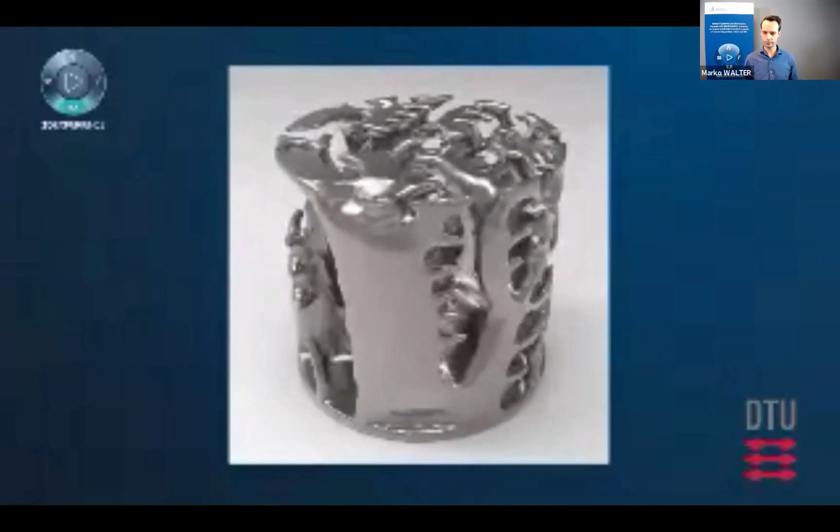As a researcher who has been one of the inventors of topology optimization, I've been in that field for 25 years. And in the beginning, people were sort of laughing a little bit and saying, hey, you came up with this fantastic structure there, but nobody knows how to manufacture it. So what are you going to do there? And I said, well, let's see, with time, this will come. And so it has sort of steadily been increasing this field all the time here for 25 years.

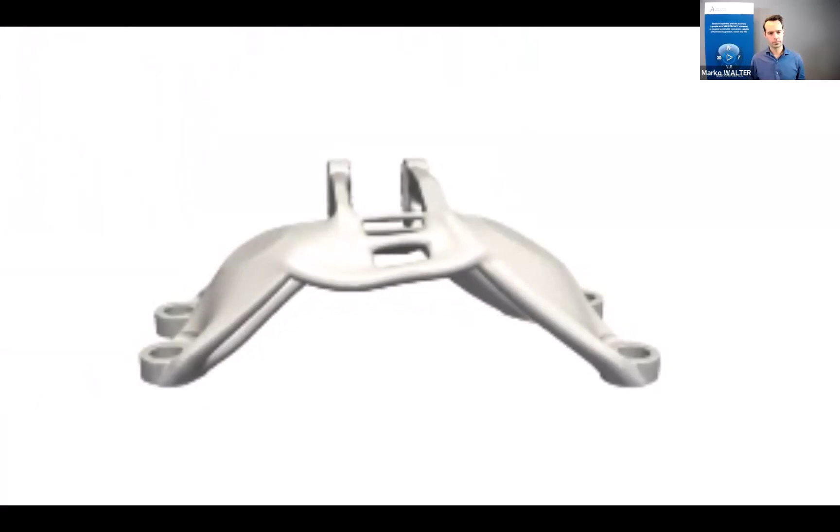But now recently, in the last few years, it has really increased the speed of development with additive manufacturing and combining it with topology optimization. So for me, it's really fantastic to see how many industries are using it. So essentially, additive manufacturing offers ultimate freedom for manufacturing, but they don't know how to come up with these optimal parts. And on the other hand, topology optimization uses this ultimate freedom to come up with parts that are optimized for specific load cases and extreme situations.

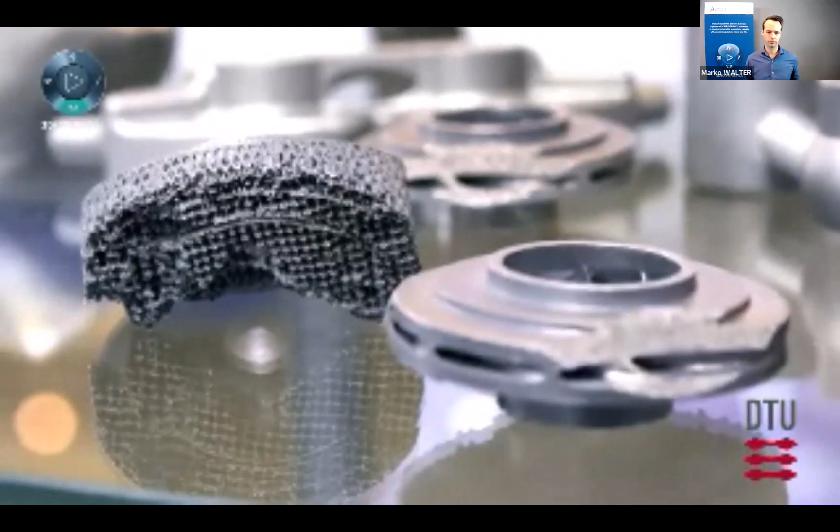And so topology optimization provides the designs to additive manufacturing, and additive manufacturing makes it possible to realize the designs coming from topology optimization. So that is an ideal marriage. So it's an interesting research area that still has so many possibilities and so many open ends. So lots of interesting research and development to be done there. And certainly the last sentence has not been said in that aspect yet.

So as you can see, this is quite an exciting topic that has been around in structural mechanics for a while, and it's really proven technology, even branching out into other physics like fluid dynamics and photonics. However, when it comes to electromagnetics, and specifically on the high frequency side of things, and as we're talking about antenna design today, I would say it's something that has not yet taken off. And so today I would like to introduce to you the topology optimizer we have available with the new release of CST Studio Suite 2024.

As it is a new topic for antenna engineers, including myself, the essence of what I will present here is still very much research oriented, and I will be showing multiple test vehicles and examples that we have successfully done so far. But my hope is really that after this talk today, at least you will be inspired to try it out for yourself and really try and push the boundaries of conceptual design for antennas.

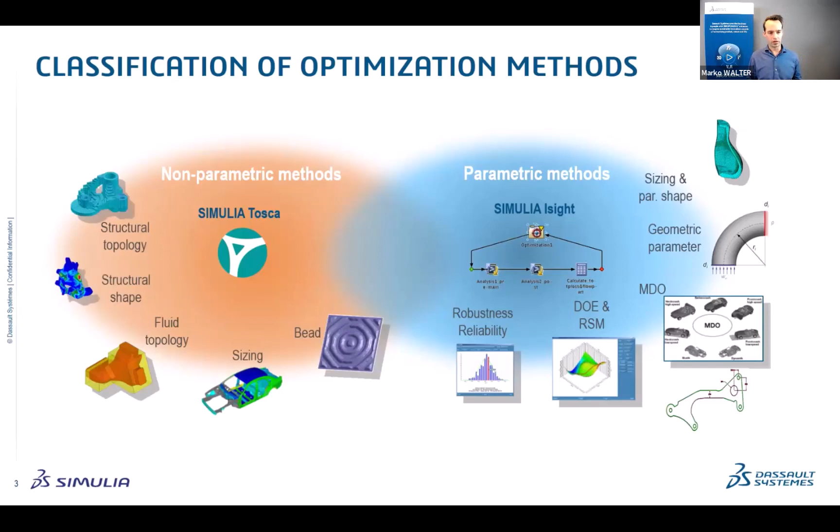On the left-hand side, then you have the non-parametric methods, which is provided by SIMULIA's tool called Tosca, also available on the 3DEXPERIENCE platform through different roles available there. But I will be talking about the standalone version today, and it can cover different things like structural topology, structural shape, fluid topology, sizing, and even beading. So topics that are well suited for structural mechanics. And then of course there can be also a combination of both these groups.

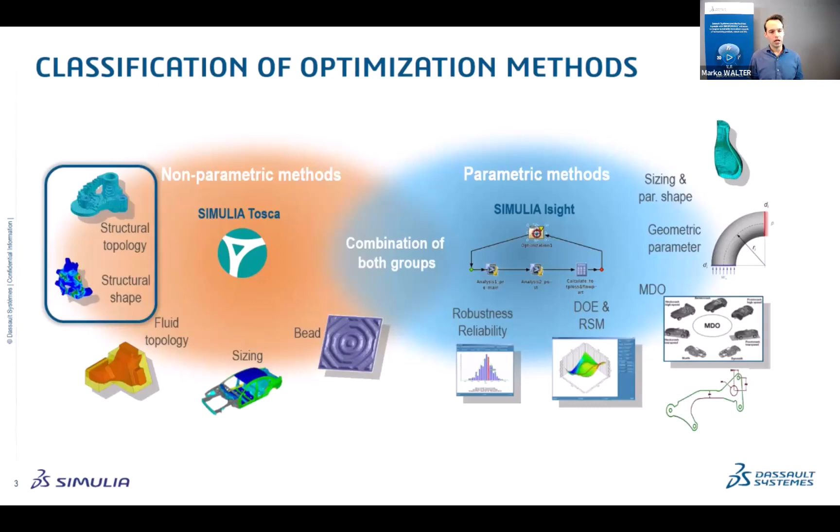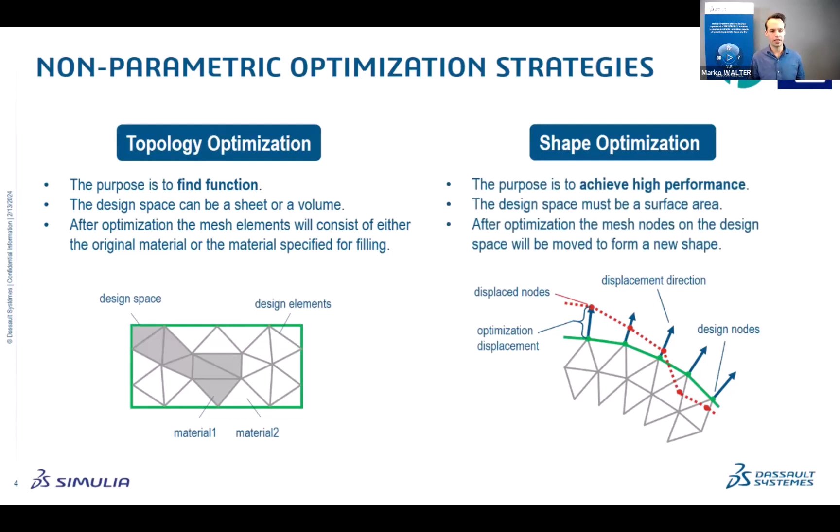On the right-hand side, then we have shape optimization, which has the purpose of really starting from a design, starting from something that already has some performance, and you want to achieve really high performance. You want to squeeze out the last bit that you can. And the design space there would be then some surface area. This can also be a volume, just the surface of a volume. And the idea is that after optimization, mesh nodes are moved on this space to really form this new shape.

However, the focus of this talk today, specifically for our antenna applications, is topology optimization. I will circle back to shape optimization, and just a note on that as well. Tomorrow, during the filter and components day, we will have a talk on shape optimization as well, and I'll touch a bit on antennas there as well.

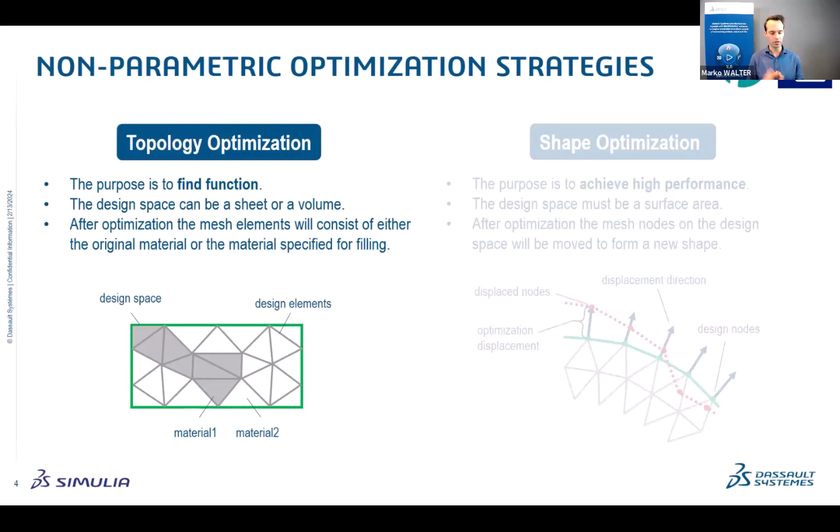Now, for non-parametric optimization, we support the frequency domain solver with model order reduction, as well as the eigenmode solver with general lossy, meaning that it can also take loading effects into account. But the eigenmode solver is a bit more tricky when it comes to topology optimization, well suited for shaping. But we're not going to focus on this because we're going to focus on driven problems today, and specifically scattering problems for antennas.

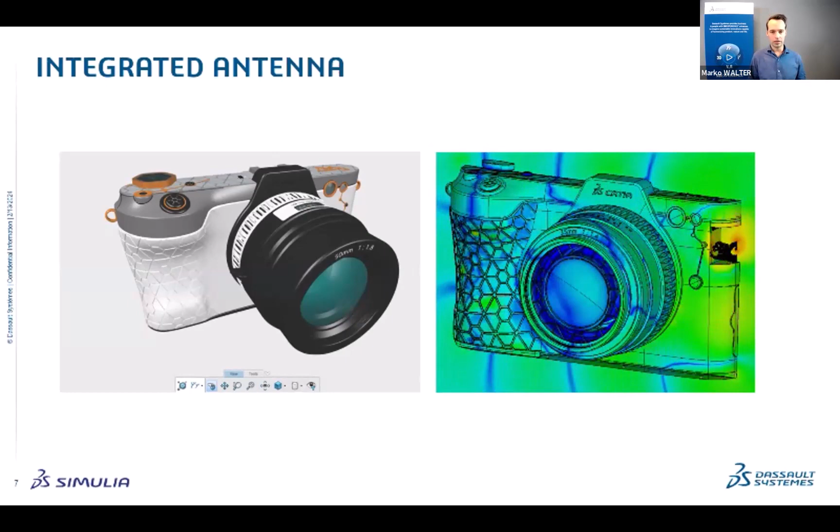So let's talk about some antenna concepts. Let's start with just some conceptual things. So let's say you have a device here. It's specifically a camera with a transceiver on it, and it's supposed to upload really large files very quickly to the cloud. Of course, you need connectivity then, and this product is already close to production, and they need a connectivity module. There's just a small space allocated within this product for the antenna, for the radiator itself. And so the question is what to actually put in there.

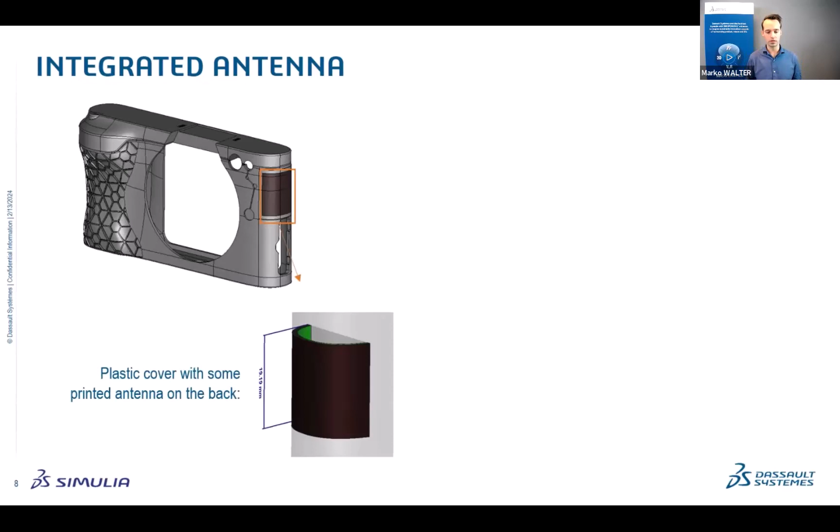So there will be this ABS plastic cover. So why not just print on the back of this cover? You can see the plastic cover there. Can we explore this design space and see if some topology is appropriate? So you see this green space on the back of this cover, which is not connecting with the device itself electrically or conductively. And you can see the coax connector placed on the edge of the design space. This is just the seeding point for this problem. It can be placed at any point, and you will get a different topology out.

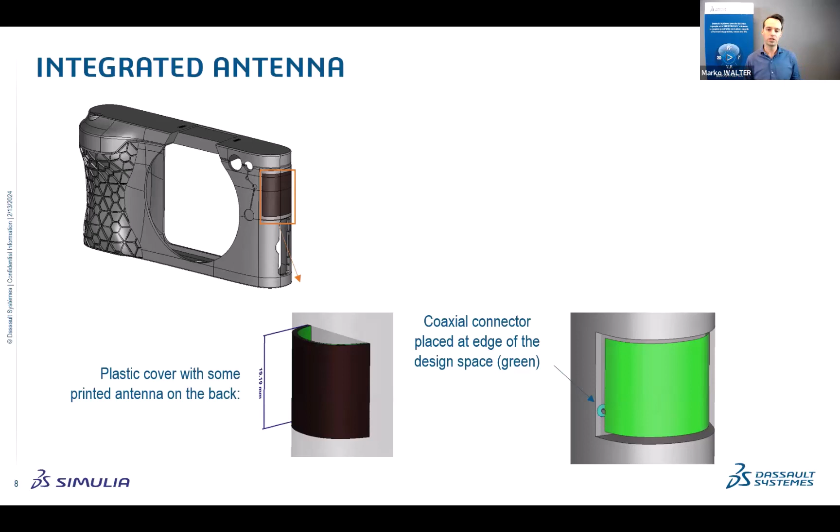So the motivation is, can we get radiation efficiently over the spectrum from 3.4 to 3.8 gigahertz? So here you can see the topology starting to optimize, and the dark red is indicating a good conductor, and you can see the blue section is just falling away, which is vacuum in this case.

And we are maximizing radiated power, which you can see as the objective function in the top graph, and after a few iterations it's already getting very high. And of course, the input power in CST Studio Suite is typically 0.5 watt, which means it's getting close to that, reaching a level of probably 90%. We'll look at the numbers in a second.

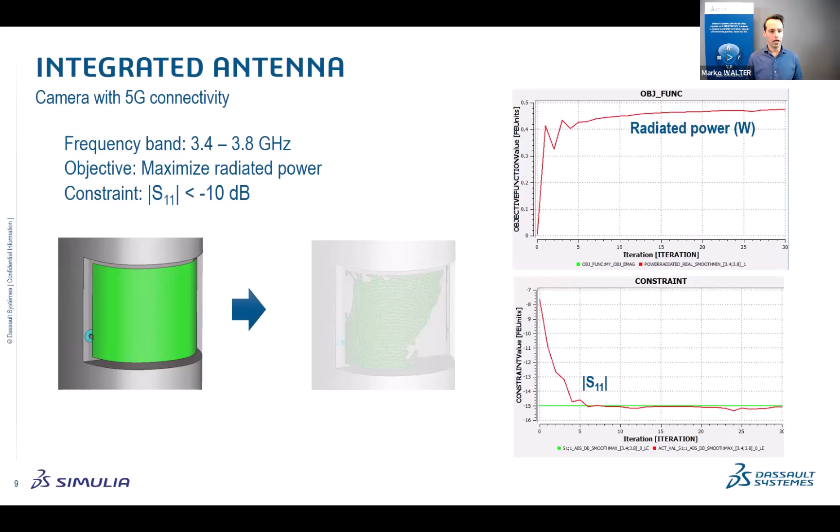You can also see at the same time the reflection coefficient dropping below minus 15 dB in this particular case. And with that, you have this new interesting looking topology, and you can verify the results even with another solver to determine the radiated power efficiency and specifically the input match, where you get a broader band, but of course your efficiency will degrade a bit.

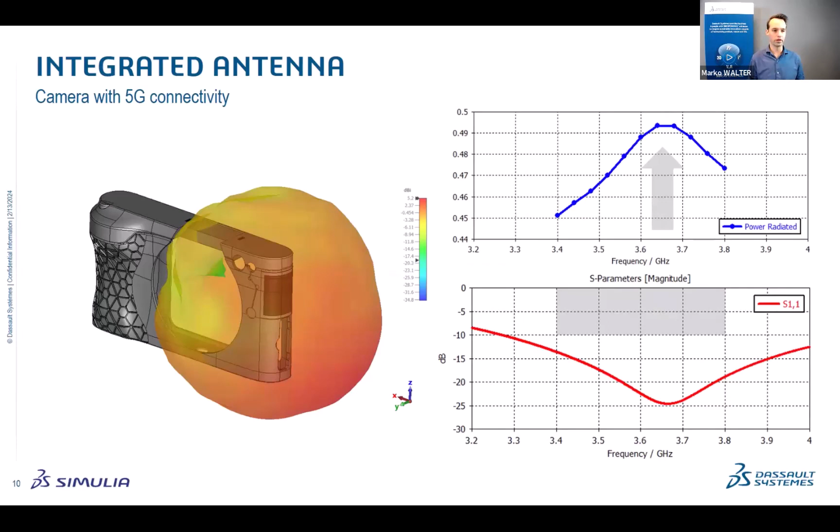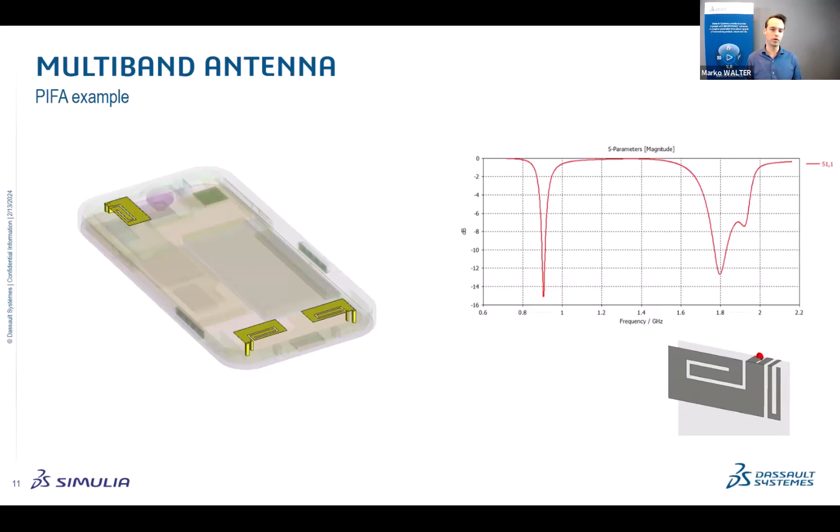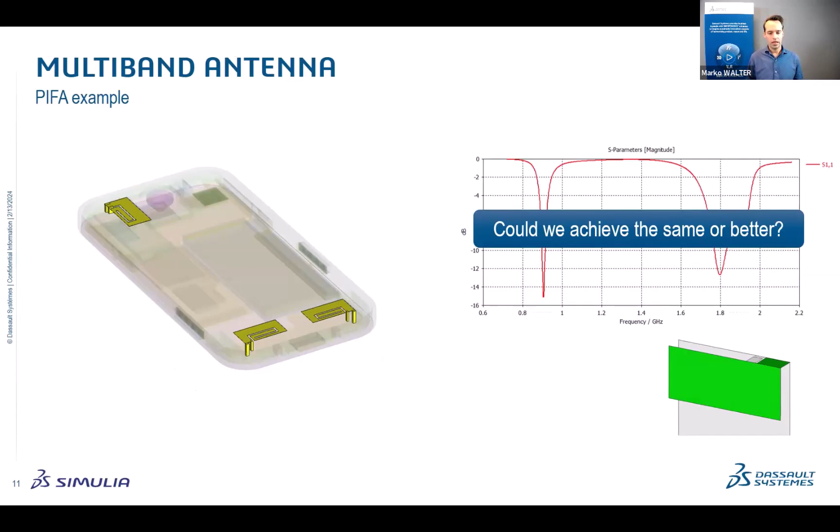Now, another simple example, talking about integrated antennas: PIFA antennas have been used for a long time, and they have good properties for a multi-band response. So the question is, can we take just the sheet in the same footprint and achieve something similar or perhaps even better? So we maximize the radiated power at 900 megahertz and at 1800 megahertz, simultaneously constraining the reflection coefficient in both these bands.

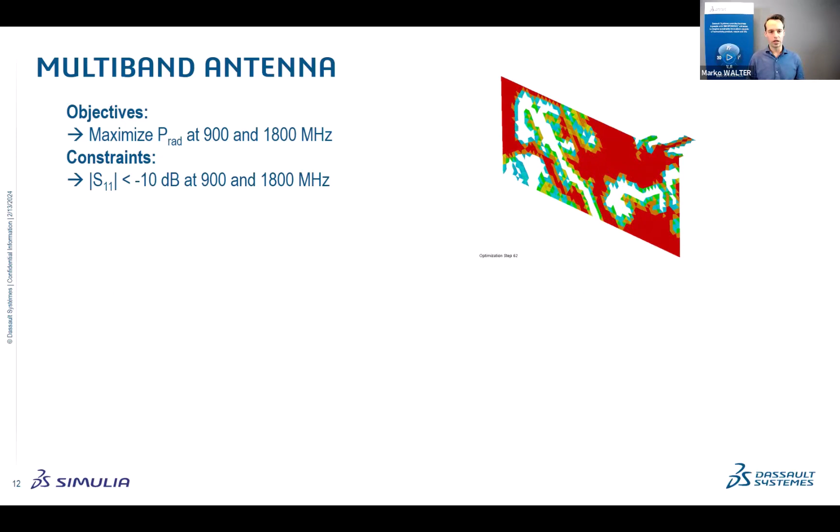And you can see the topology coming together. You see that inductive part next to the feeding point coming together, still shorting out to the backplate there, which is also necessary for the lower band.

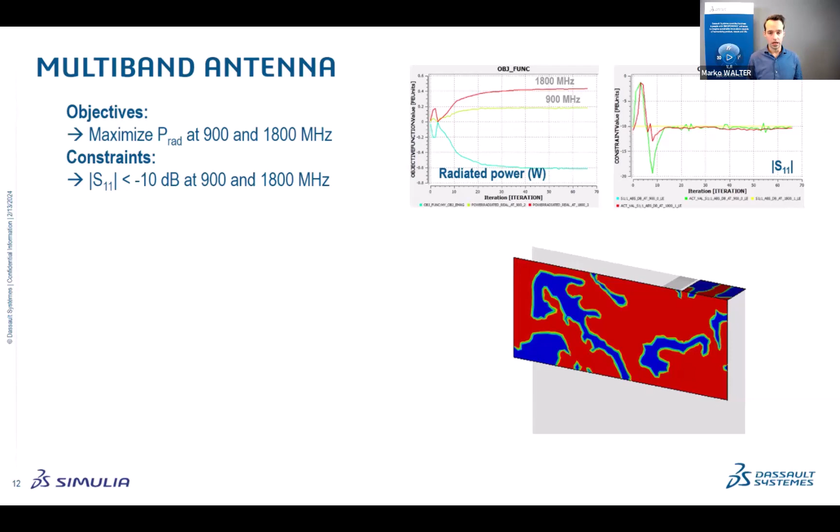And you can see then the radiated power again, 1800 megahertz and 900 megahertz going up. And the thing is, you need to verify these results again because, and I'll explain this in a second, basically you want to specify some threshold for the densities. These intermediate densities are going from vacuum to the conductor, and to cut something out, to get some ISO cut as we refer to it, to extract the specific topology. And this threshold can also vary, and I'll talk about that in a moment.

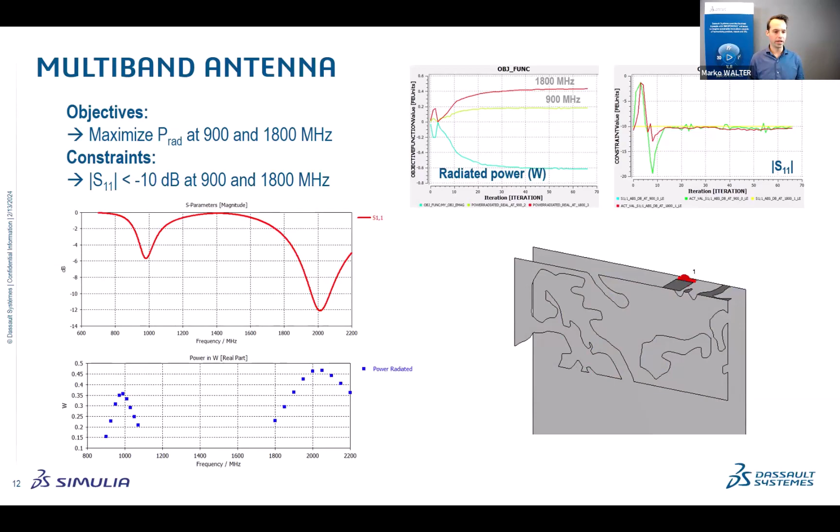You can see then on the left-hand side also the input match and the radiated power at the bottom. So not too bad, but it is shifted. If you've noticed, the objectives were at 900 and 1800, so it's slightly shifted. And the reason for that is that we are actually working with intermediate densities, which can be observed here from the conductivity. If you look at the color ramp there, going from close to 0, which is essentially my vacuum or my air, to a very high value for a good conductor. In this case, I think it was copper or something. The result is that everything in between is essentially posing dissipated losses to the signals, right?

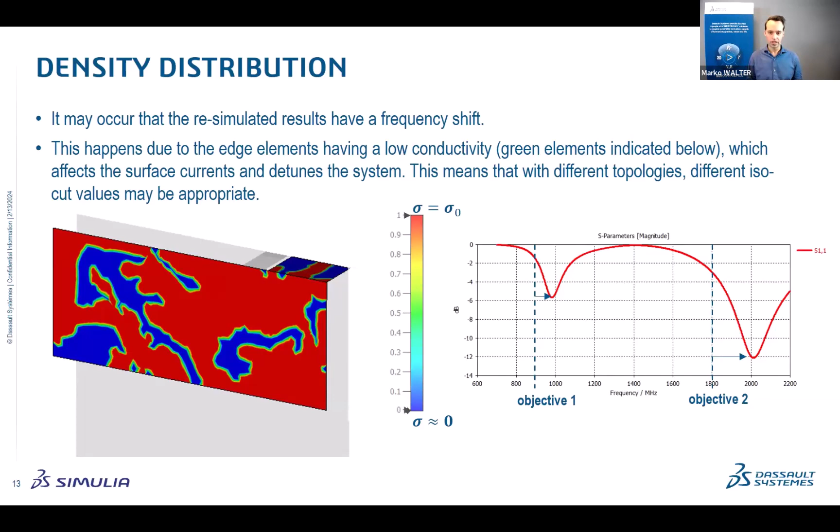Now, let me try to explain a bit why we need these. So with the topology optimization, the original integer problem is basically relaxed here, allowing continuous and intermediate design variables. These so-called intermediate densities then allow for a mathematical programming approach using adjoint sensitivities. So every element essentially is sensitive to some degree to my objective function or my constraint. And this adjoint sensitivity approach has a very good track record for efficiently optimizing large problems. So we're talking about being able to address thousands to even millions of design variables in just a few optimization iterations. Okay, so that's some context for why we use these density distributions.

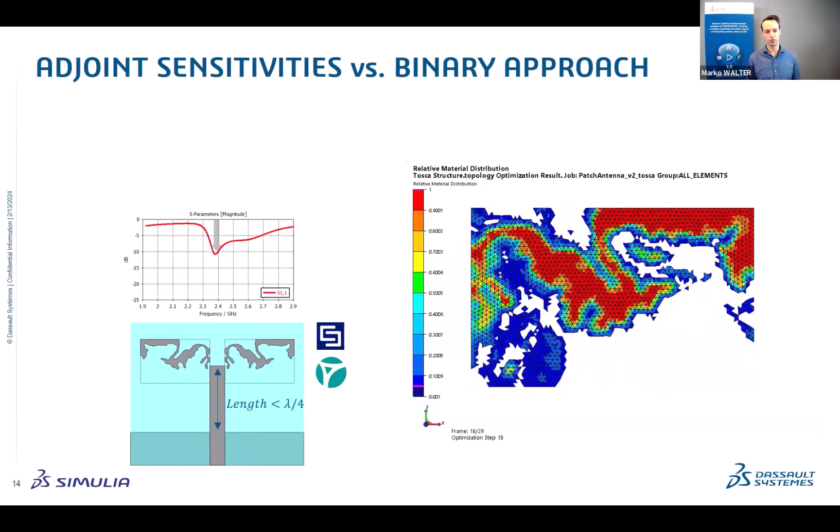Now, here is a simple illustration of how efficient this is. We have a short printed monopole where the parasitic elements are used to obtain a good input match at 2.4 gigahertz, because of course, when it gets so short, the radiation resistance is getting much lower, and so it's tough to match this. You can just see the topology coming together here, and you can see those intermediate densities falling out and just the red topology remaining. And again, this is where you would do an ISO cut at some value. The default is 0.5 essentially, and then you get the picture on the left bottom corner. In this case it took just 28 iterations to do this gradient-based optimization with a fairly dense mesh as well.

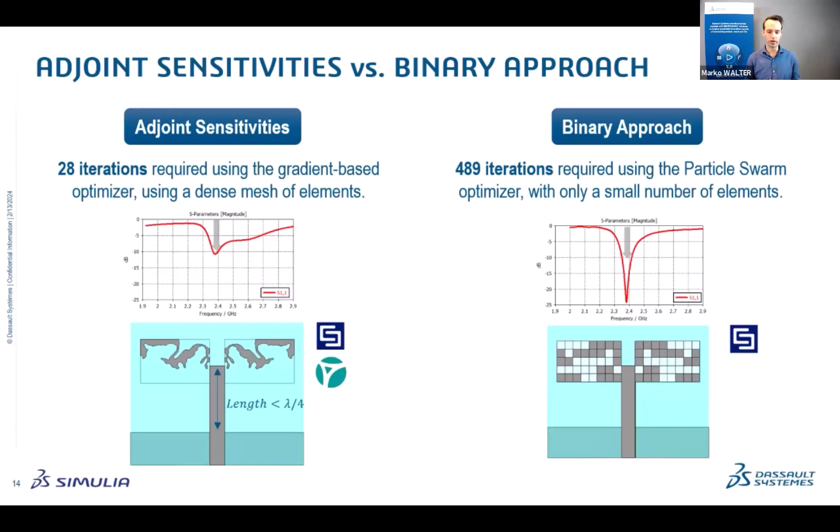Now, it is probably a slightly unfair comparison, as the connectivity of these rectangular shapes can be less desirable for conductors. You can change the shaping, but you will probably have to increase the number of elements. The point is your number of optimization iterations will quickly start blowing up, and this also poses a problem for efficient optimization. Okay, so enough on that.

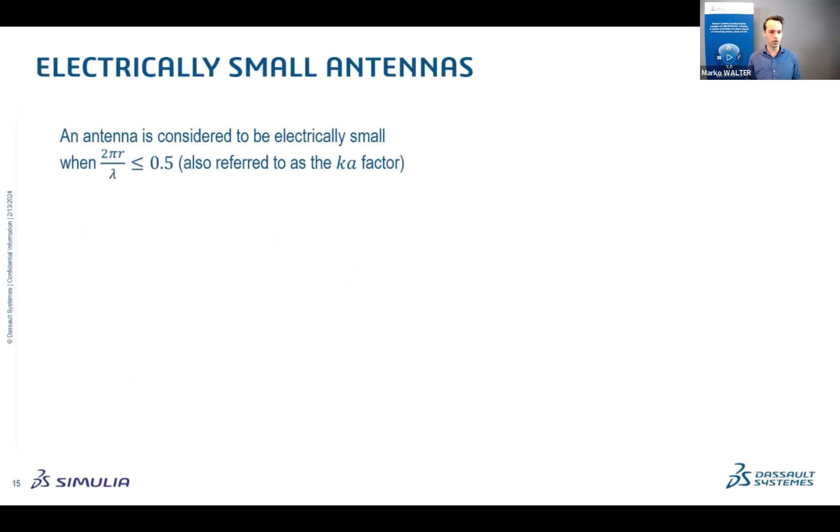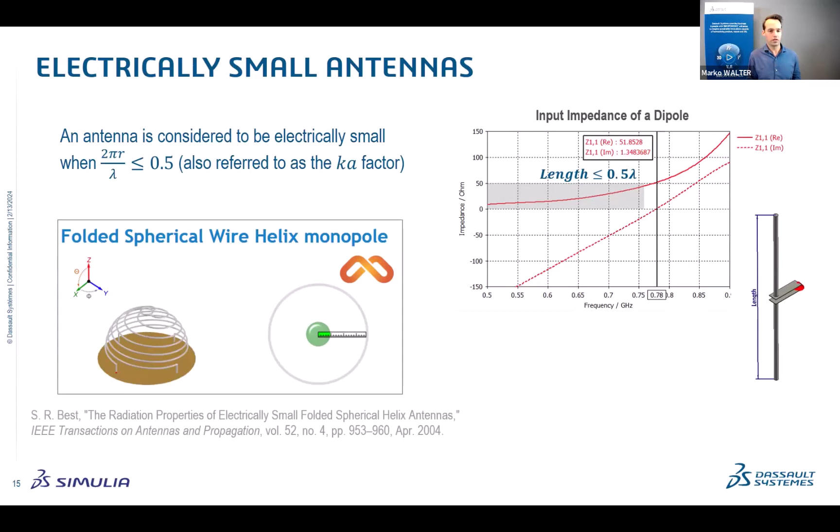The point is, when the antenna gets very small relative to the wavelength, the input resistance becomes very low, and of course, it's no longer an efficient radiator, and it's no longer matched to 50 ohm, right? So we want to try and see if we can get something out of a design space that is within this range. So we make use of a hemisphere over an infinite ground plane, just a sheet suspended above ground. Of course, we make use of our knowledge of this design that I just showed you, and we place one coax port and 3 shorted pins.

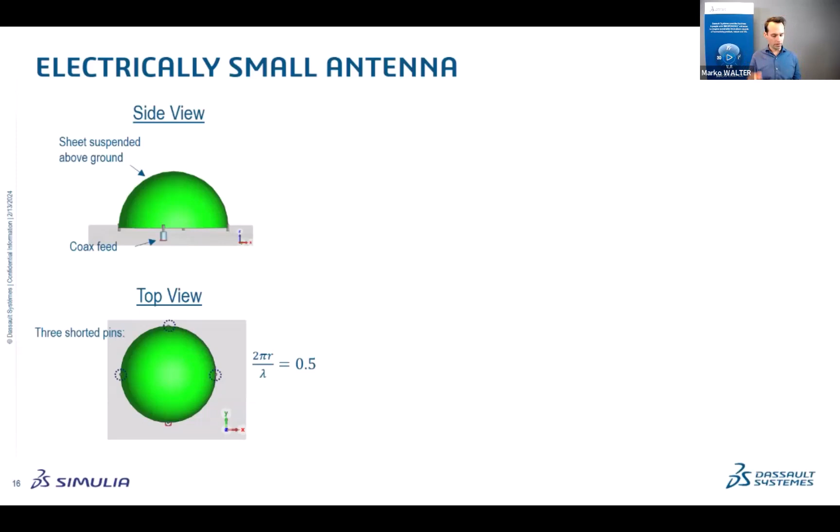And these pins are basically just, again, seeding the design space to run in a certain direction, or to try and get a good topology in the end. So not being completely black box. And then in addition, we also use a type of perturbation density distribution. So we don't start from a uniform density distribution, but actually it's sort of perturbed, as you'll see when I show you this picture there.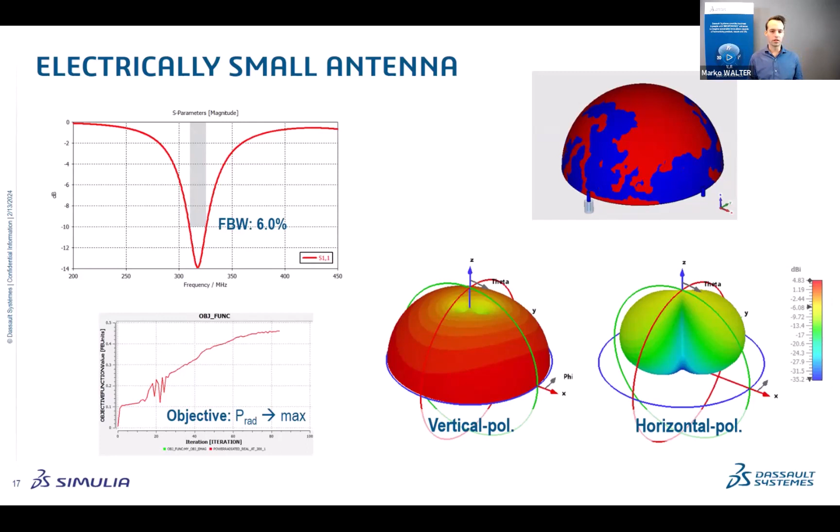Yeah, but without going into too much details, the point is we do get some good results, and as expected also we get a good vertical polarization over this ground plane with a small horizontal component. And again, look at the convergence curve on the left-hand side corner. You know, just about 80 iterations, and the radiated power is maximized in this case.

So we've talked a lot about the sheet sort of antennas, optimizing sheets. Let's talk about the volumetric antenna. So as I described before, it's also possible to have a volume or a volumetric mesh and try and find the topology there. So similar example to what we had before. This time we're filling that whole space just with metal and then trying to find the topology within this. You can see the topology that sort of comes out. Again, it's dependent on where you're feeding it, how you're feeding it. So I'm not going to go into the details of those.

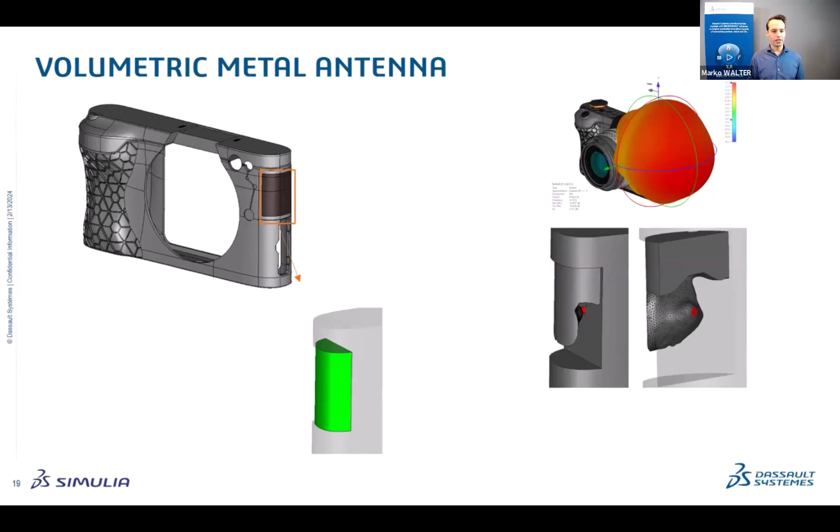I'd rather move on to this interesting example as well, which is dielectric resonator antennas. Now, of course, you can do characteristic mode analysis on this stuff, or you can just take a simple example from Antenna Magus and see if you can even improve it. So this is just the simplest form, with a rectangular resonator and the pin fed through an infinite ground plane and with the dielectric constant of 20.

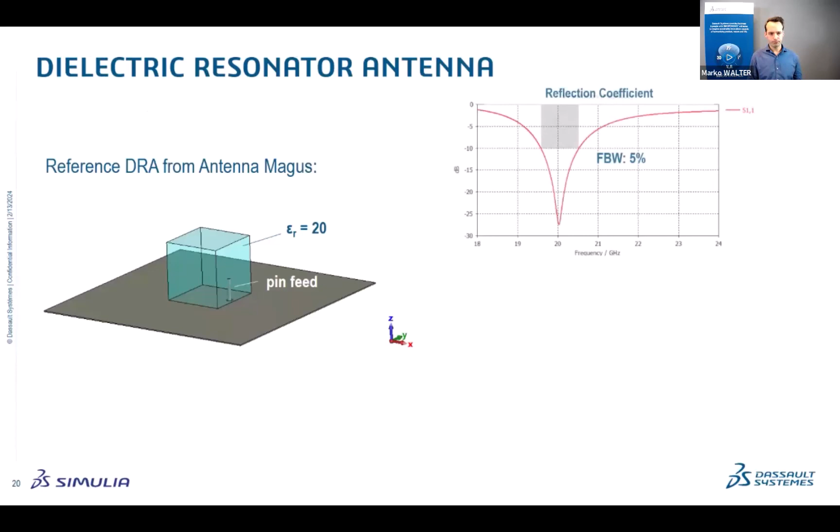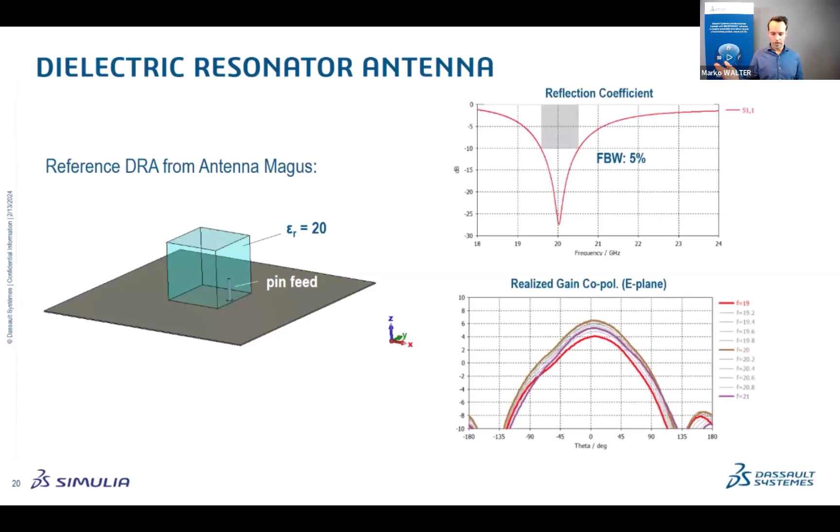And so the reflection coefficient is 5%. The fractional bandwidth is about 5% for this design. And you can see the realized gain copol then in the E-plane, how this looks like. And it varies quite a bit also over frequency. So our aim is to see if we can increase the bandwidth. In fact, we want to double the bandwidth in this case.

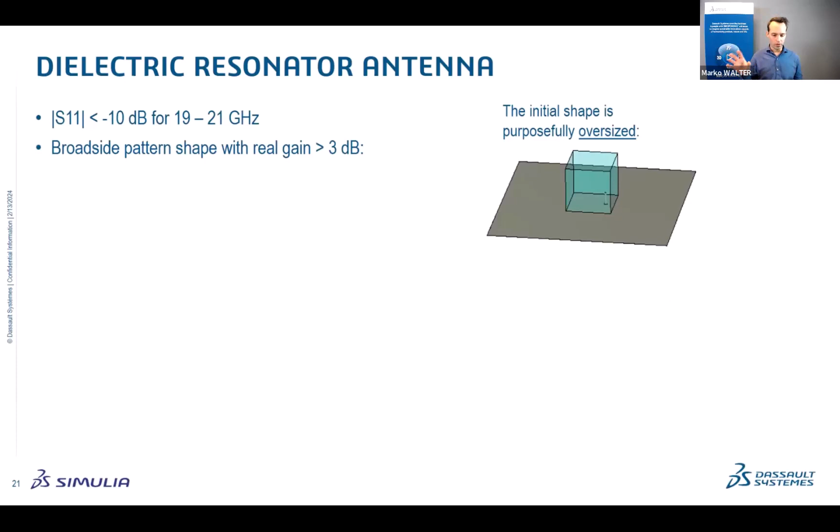So what we do is we go and set a constraint on S11, to be below minus 10 dB again, but in this case, from 19 to 21 gigahertz. And then at the same time, on the right-hand side, the model that we're going to use, we're actually going to oversize this dielectric because we want things to be cut away, right? So I'm oversizing this model, and this would result in a squint also in my far field. So you can see the cuts again here stretching from 19 to 21 gigahertz.

So for that reason, we also put a constraint on the broadside pattern. So the realized gain to be above 3 dB. And I actually want to show a bit the UI as well, so that you can see how to define these types of KPIs. So essentially, this is how the GUI looks. At the top, you select the coordinate system.

In this case, I'm selecting the Ludwig 3 system with linear polarization then and the component in the horizontal plane, and for the realized gain, because again I want to take the input match into account as well. I don't just want to optimize on directivity, even though there's no losses in this model. So it's a bit different to the conductivity example. This is a loss-free model where we are sweeping from a dielectric constant of 1 to 20. So again, you want to push out those intermediate densities.

Then you can also specify the angular range. So in this case, I'm taking the phi equal to 0 plane, or the E-plane. I'm just taking a cut and I'm saying from minus 35 to plus 35 degrees in theta, I would like to have it above a certain level, which I'll show in a second. I can also, in addition, go and specify the frequency range and say, for example, I want to use the minimum value over the frequency range, but this will cause jumping between frequencies in terms of the objective function.

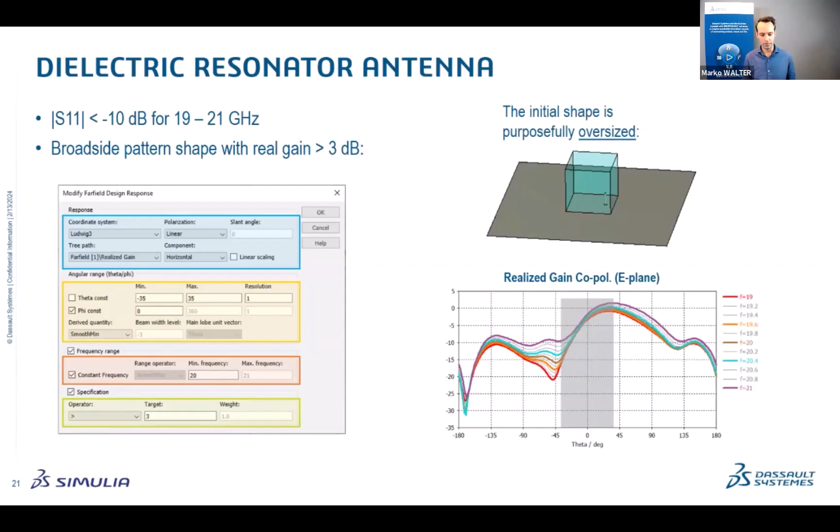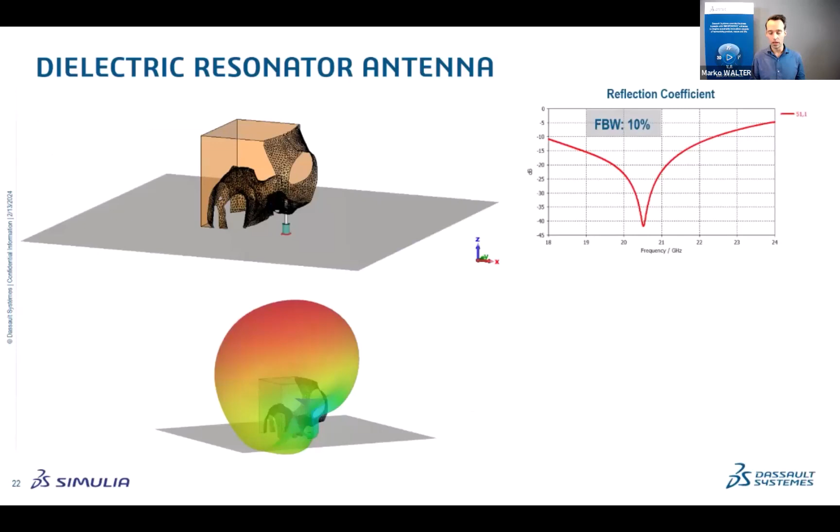Okay, and here you can see the topology that comes together. I don't have an animation here. It's a bit more tricky to see it like that. It's nicer to just see the strange surface that you have in the end. But I'm verifying this and I'm getting a lot more than 10% fractional bandwidth. But of course, the efficiency of the radiator will be degrading as I expand the frequency range.

So I didn't plot excessively many cuts here, but at least from 19 to 21 gigahertz, you can see I'm fairly above 3 dB. At 19 gigahertz, maybe 2.7 dB, but again, it's not too bad. I can see the side lobe coming up. So one can put more masks on these when you're optimizing, but in the end, it's finding some very strange topology.

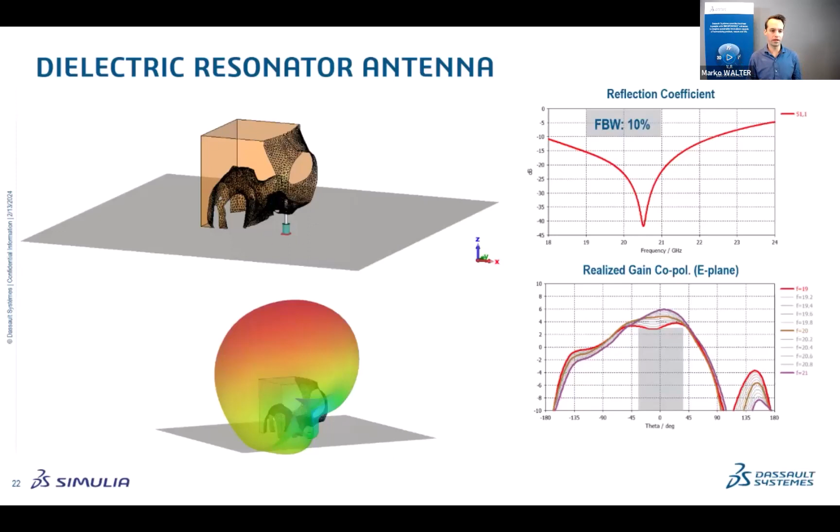And now whether you're able to print this or not, that's a different question, and how exactly you go about it. Of course, we also have different constraints that you can set on the model. Symmetry constraints, manufacturing constraints can also be used. But again, these are just some toy examples to explain to you the principles of this optimizer.

And then ultra-wideband antennas, that's the obvious next question. We talked about multi-bands, integrated antennas, small antennas, volumetric antennas. What about ultra-wideband performance? So here, you can see a typical monopole with really wideband performance, just the inverted cone shape taken from Antenna Magus. Again, you can find this in literature.

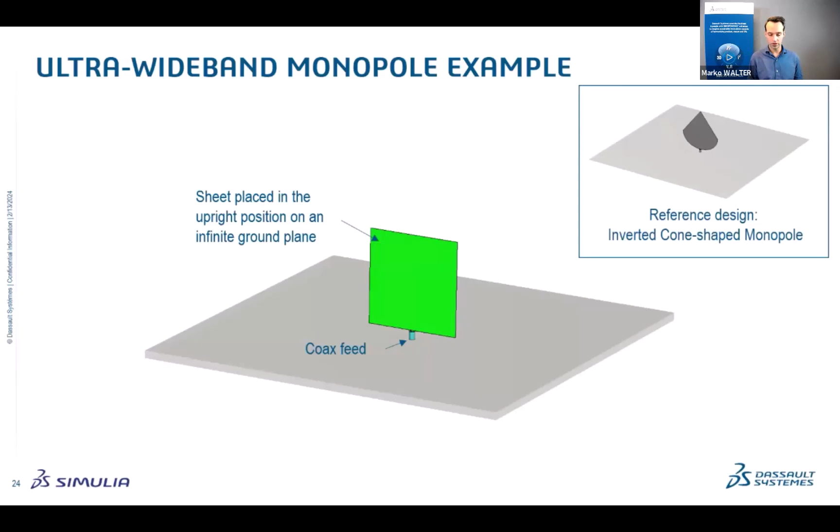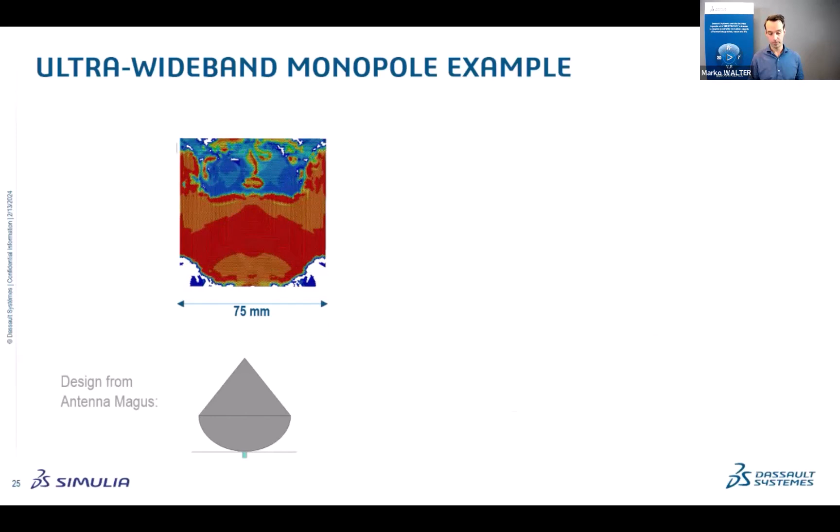So we're just saying, look, what if you take just the straightforward rectangular shape and position it above a ground plane, coax feed again, and it's even shorted there, and you say, look, find me the topology of this thing by optimizing, again, the radiated power over this frequency. And you can see the topology coming together.

Interestingly enough, at the bottom you can also see the sort of shape with the ground plane, what it's forming there, the sort of taper. And this is, of course, important to get a good impedance match over the entire frequency range. And you can see then your S11 on the right-hand side top being below essentially minus 10 dB from 1 to 10 gigahertz.

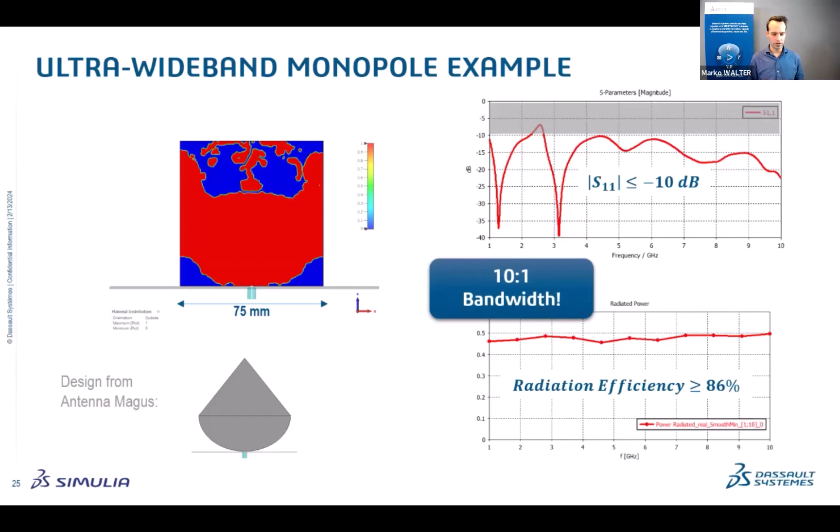So we're talking about a 10-to-1 bandwidth. And it looks fairly good, 86% radiation efficiency. Okay, there's this one peak at 2.5 gigahertz that one can still work on, but just to show the principle.

I said at the beginning I would circle back to shape optimization. So let's look at this example again, with this monopole, and we're even wrapping it around the cylinder. You can start with topology optimization and you get your topology. But the point is, the next step is then to say, okay, now I have some form. Can I shape this? Can I refine this to get better results out?

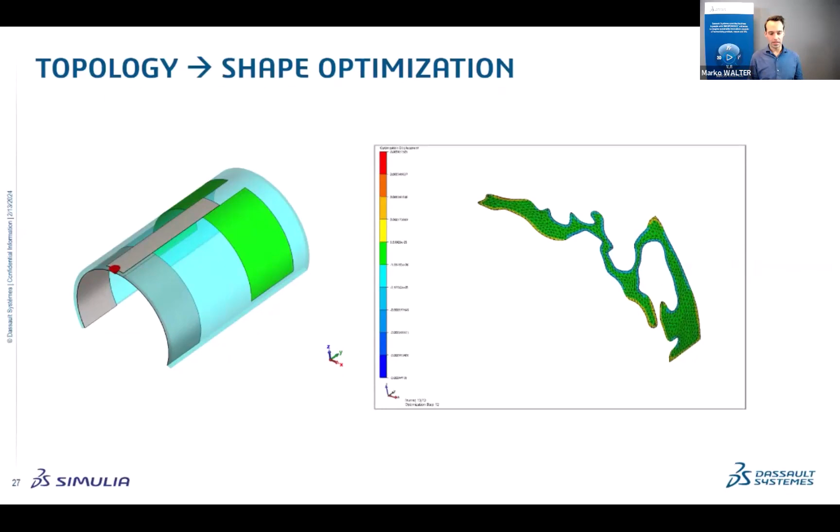And this is really the direction that we would like to take, that you can have an end-to-end design, and not just start with a black box and end with some strange shape, but actually optimize that shape and get decent performance out. So these are things to come, things that you can already do today, but maybe in a more manual way. But in any case, there's a lot to explore with this very exciting new technology.

And so in conclusion, the topology optimizer is really a conceptual design tool. It's a great addition to the antenna design engineer's toolkit. I think everyone can make use of it and get some ideas for the spaces available for certain radiators, or even use existing radiators and see if you can improve a topology.

Now, it is not exactly the generative design solution you might have hoped for when you came to this talk, but it does allow exploring new and different design spaces, within various constraints and seeding conditions.

Maybe just a small note for those of you that have access to SIMULIA's unified licensing. This workflow is already available today to test, because of course you need CST Studio Suite as well as Tosca, but with the unified licensing, you make use of your SIM units regardless of the tool you are running. And for more information, you can always visit the knowledge base and take a look at the Q&A that we have available on this topic.